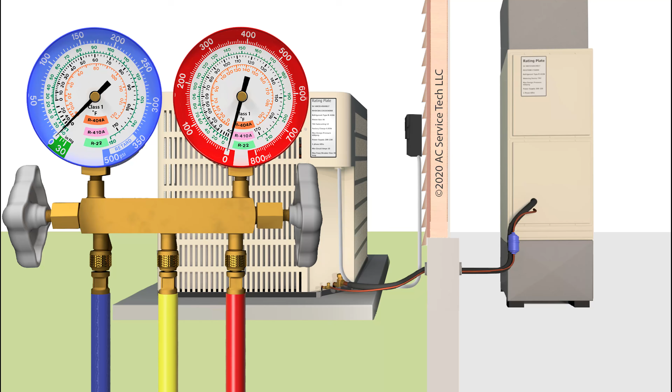In this HVAC training video, we're going over checking the charge of an R-410A air conditioner. We're going to go over 4 scenarios using the subcooling method because this system has a thermostatic expansion valve at the indoor unit. We'll assume the airflow has already been checked and is correct. I'll explain scenario 1 to tell you if we're undercharged, correctly charged, or overcharged, and then in scenarios 2, 3, and 4 you can pause the video and determine the charge level yourself. I'll explain it as I go.

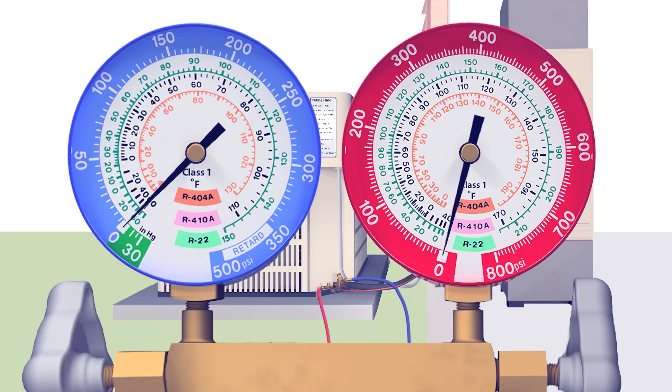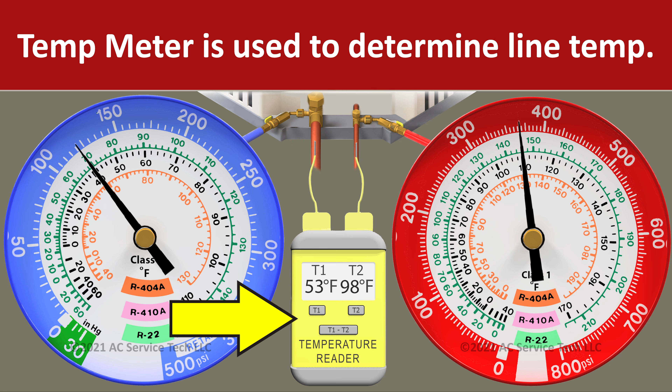To check the charge, we have our blue gauge connected to the large vapor line, that's the low side, and the high pressure side, the red gauge, connected to the small liquid line. We also have our temp meter attached to both lines. We're using the subcooling method, so we'll focus on the high side gauge and the temperature on the liquid line.

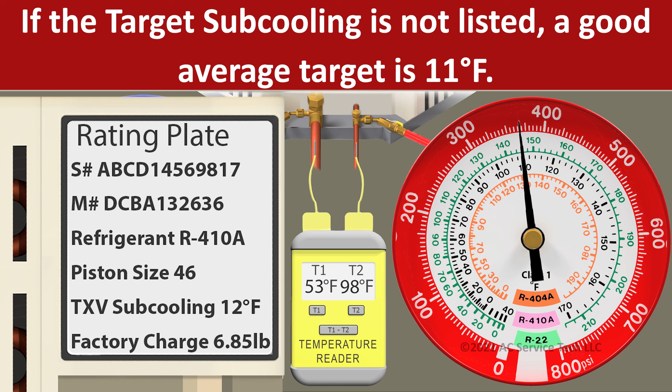We have our target subcooling posted on the rating plate. In this case, there's only 1 target subcooling rating. Sometimes there are 3. In this case, it's just an average, so it's only 1. We're going to compare our actual subcooling to our target subcooling.

Scenario 1: we look at the red gauge and see 366 PSI, which converts to a saturated temperature of 110 degrees on this gauge face. You can use an app or calculator, but here we're just using the gauge face. Our line temperature for the liquid line is 98 degrees, so we're left with 12 degrees of subcooling. That's 110 degrees saturated temp in the middle of the outdoor unit, and 98 degrees on that small liquid line where the liquid is exiting the unit. So we're left with 12 degrees of subcooling, which is the exact amount called for on the rating plate.

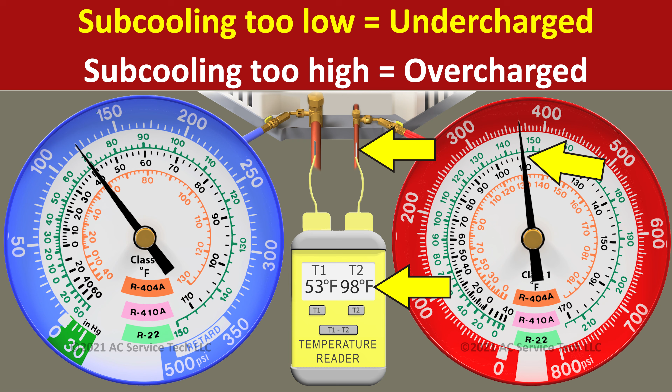We can be within plus or minus 3 degrees of the target subcooling, so even up to 15 degrees or as low as 9 degrees of subcooling, we'd still be technically accurately charged, but we want to be as close to the target number as possible. The long and short of it is, if your subcooling is too low, you're undercharged, and if it's too high, you're overcharged.

Scenario 2: we have 319 PSI on the red gauge and read a line temp of 95 degrees. If you're going to figure this out on your own, go ahead and pause the video.

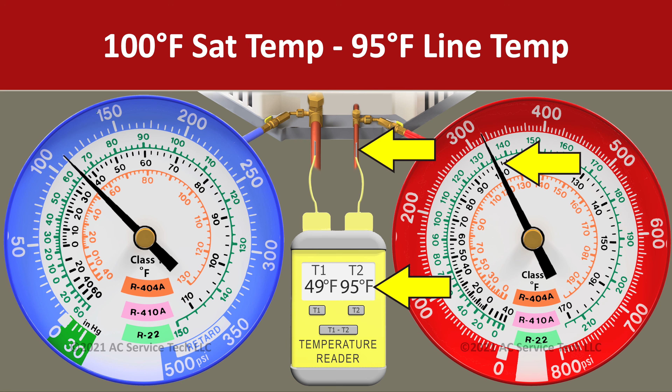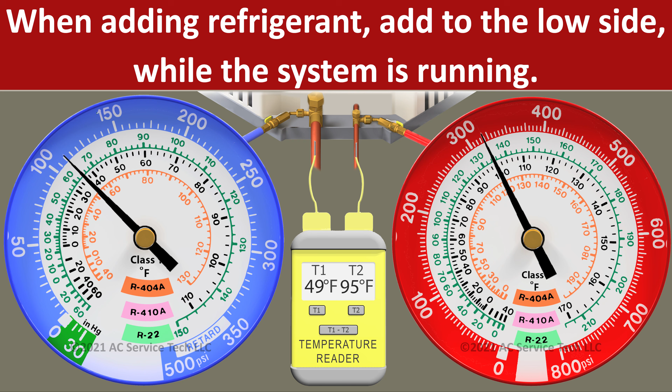Okay, so we have 319 PSI, which converts to an R-410A saturated temperature of 100 degrees. 100 minus the 95 degree line temp leaves us 5 degrees of subcooling. That means we're low on refrigerant, since we're 7 degrees lower than the target subcooling posted on the rating plate. In this case, we'd need to find out why we're low on refrigerant—maybe there's a leak—but if we were to add refrigerant, it would have to go into the large vapor line, the low side, while it's running.

Scenario 3: we have 387 PSI on the red gauge, and a line temperature on the liquid line of 94 degrees. Go ahead and pause the video now if you're going to solve this on your own.

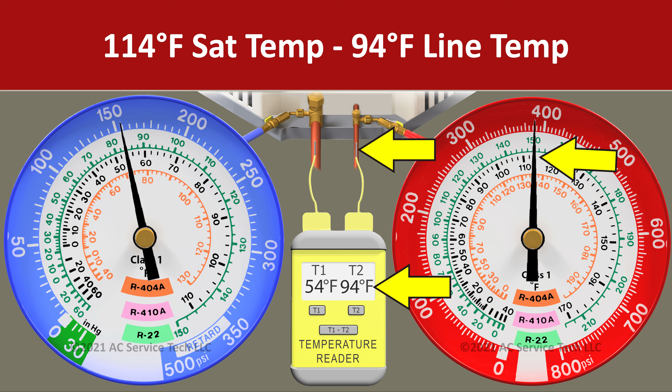Okay, so we have 387 PSI, which we convert to a saturated temperature of 114 degrees. 114 minus 94 degrees leaves us a subcooling of 20 degrees. That is high, so we're overcharged in this scenario—8 degrees higher of a subcooling than what we should have, as posted on the target subcooling on the rating plate. If we're overcharged, we need to remove refrigerant and recover it out of the small liquid line while it's running. Remember, you can only do a small amount of that, because we would accidentally be removing some oil from the system.

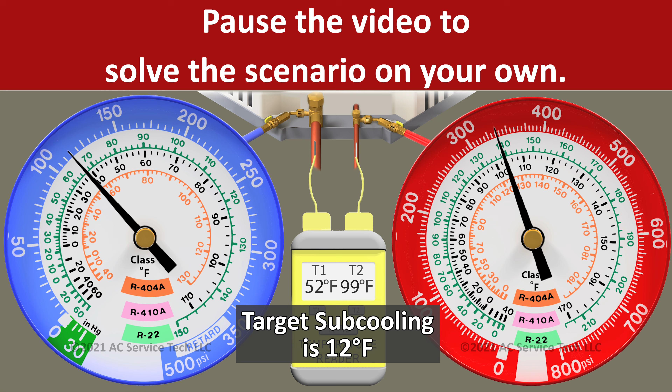Scenario 4: we're measuring a pressure of 336 PSI, and we have a line temp on the liquid line of 99 degrees. If you're going to solve this on your own, go ahead and pause the video now.

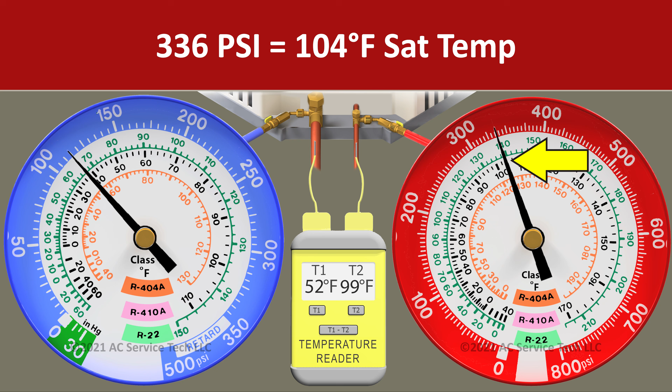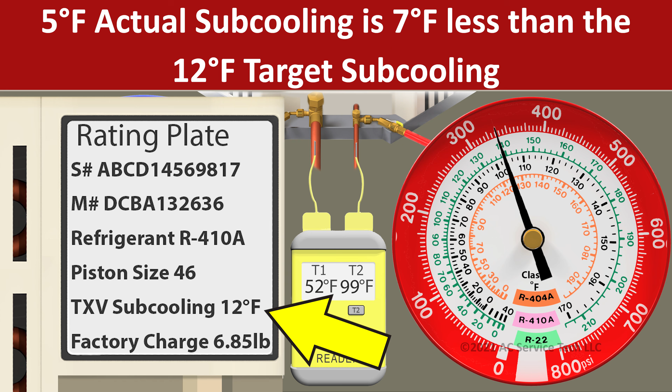Okay, so we have 336 PSI converted to a saturated temperature of 104 degrees, minus a line temperature of 99 degrees, and we're left with a subcooling of only 5 degrees. So we have a subcooling that's 7 degrees lower than what our target is, posted on the rating plate.

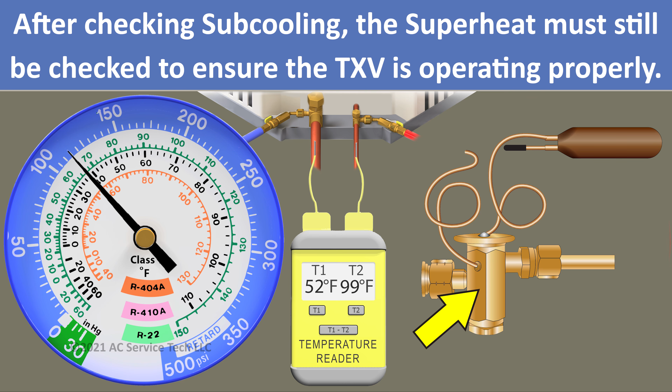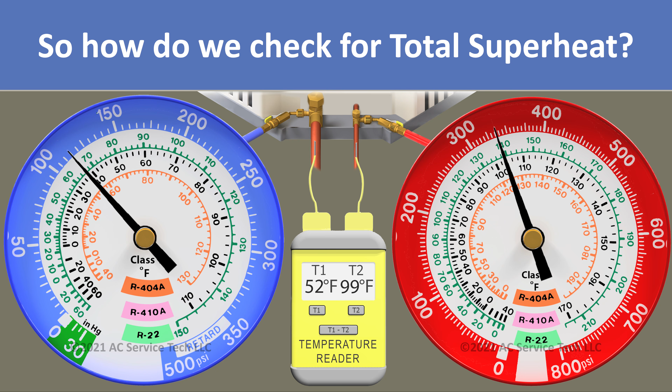I also want you to know that when you check subcooling, you also want to check superheat to make sure the thermostatic expansion valve is doing its job properly. Of course, we're checking total superheat because we're at the outdoor unit, and we should have somewhere between 8 to 16 degrees of total superheat, measured on the blue low side gauge with the temperature on that large vapor line. Let me explain how to check total superheat, just so you're aware.

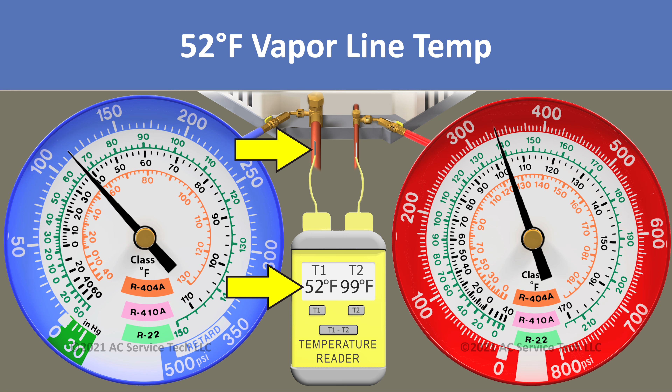In this case, we have a vapor pressure of 114 PSI, which converts to a saturated temperature of 38 degrees, and we have a line temperature on the vapor line of 52 degrees. We take the line temperature minus the saturated temperature, so 52 minus 38, and we're left with 14 degrees of total superheat.

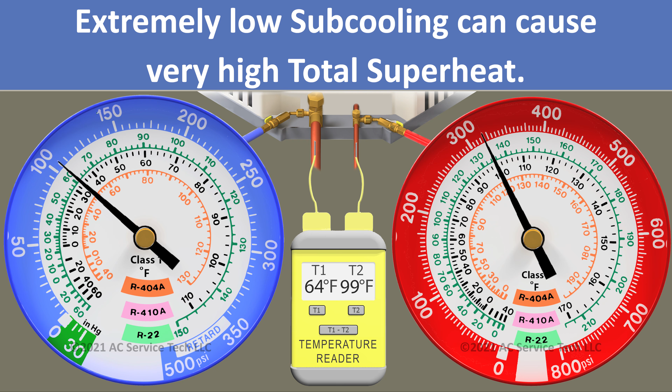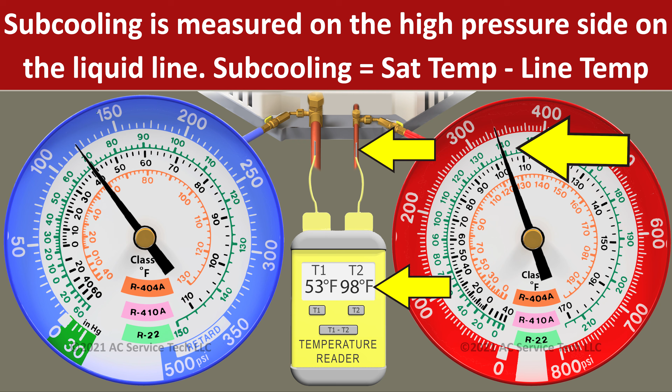So you may have somewhere between 8 and 16 degrees of total superheat regardless of your subcooling, unless you only had say 1 or 2 degrees of subcooling—in that case, your superheat may be very high. I want you to be aware that with a thermostatic expansion valve, it's going to control the superheat as long as you have some subcooling. So you really need to focus on that high side gauge and the temperature on that small liquid line when checking the charge with the subcooling method.